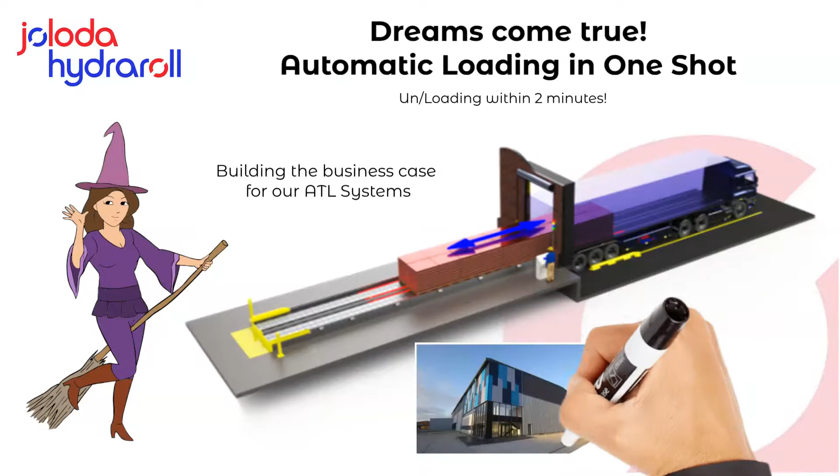But before I begin, allow me to briefly explain about Joloda Hydraroll. We are the world leaders in loading solutions, supplying efficient, effective loading and unloading systems for over 50 years. Thanks to our expert knowledge, we match the right solution with the right business every time. And with an experienced network of over 30 global distributors, we can help innovate, automate, and streamline your logistics wherever you are.

Building the business case for ATL system. Now you can see the main points of our methodology. In the next slides, we will examine each one in more depth.

Joloda Hydraroll's questionnaire. The first step in building the business case is for us to understand what your current situation is. The questionnaire helps us to do this.

Assessment of viability. When we have received the complete questionnaire, we study it to assess the viability of the project.

Current situation in a schematic drawing. If we consider the project is viable, we illustrate the current situation using a schematic drawing. At this point, we have all the information needed to develop the project.

Now, we will be focusing on the following aspects: quantitative and qualitative analysis. Here, the return on investment is one of our priorities.

Choosing the best solutions. After analyzing your requirements, we will choose the most efficient solution for your project.

Drawing of the future situation. We illustrate the proposed and current situation in a schematic drawing, where you will be able to compare both.

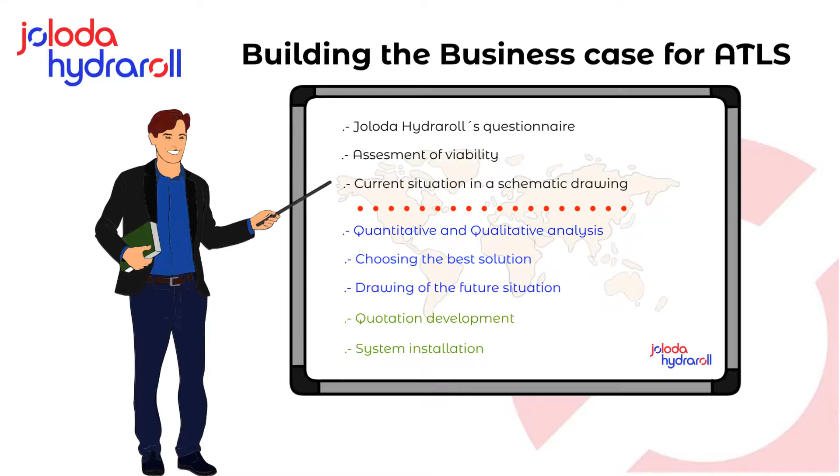Joloda Hydraroll's questionnaire. This questionnaire is the foundation of the project, and it's divided into a number of sections.

Contact information: we ask you about the people who will be involved in the project. Background information: how you work in the current situation. Loading types: type of products, pallets, how many pallets move per day, etc. Operational working day: how many hours, shifts, etc. are worked per day.

Current equipment and transport information: what type of equipment and trailers you use. Trailer trip information: what type of trips the trailers make. Duration of the current trip: how long the logistics process takes overall. Additional data: costs involved in the operation, photos of equipment, pallets, etc. In fact, all the information you will share with us.

Assessment of viability. When the questionnaire has been filled out, it's time to assess the viability of the project. The assessment involves our sales, technical, and projects departments, focusing on the link between the requirements of the project and our solutions. We can then decide if the project is viable.

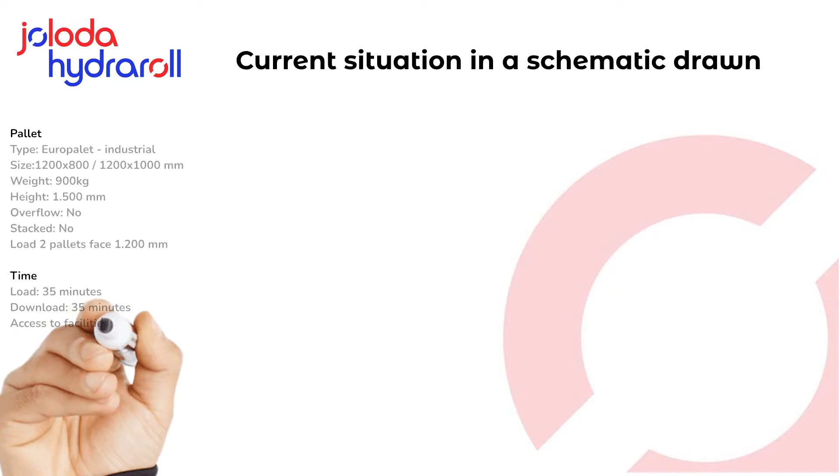Current situation in a schematic drawing. As the saying goes, a picture is worth a thousand words. We always make a schematic drawing of the current situation. In this example, we have drawn a standard situation.

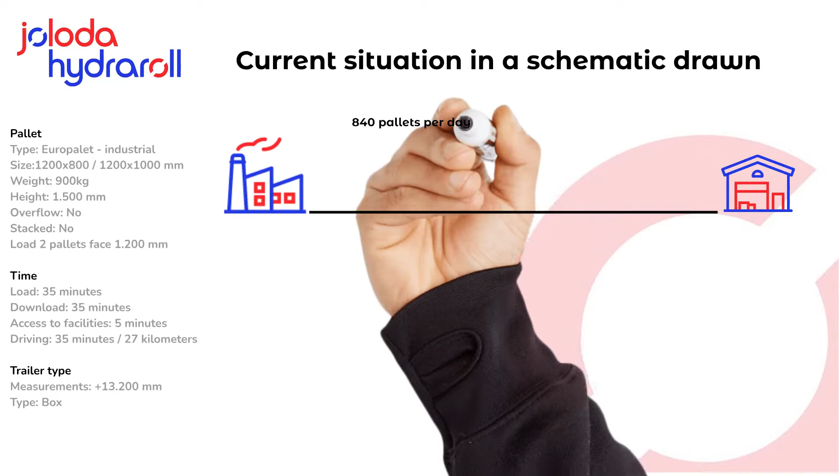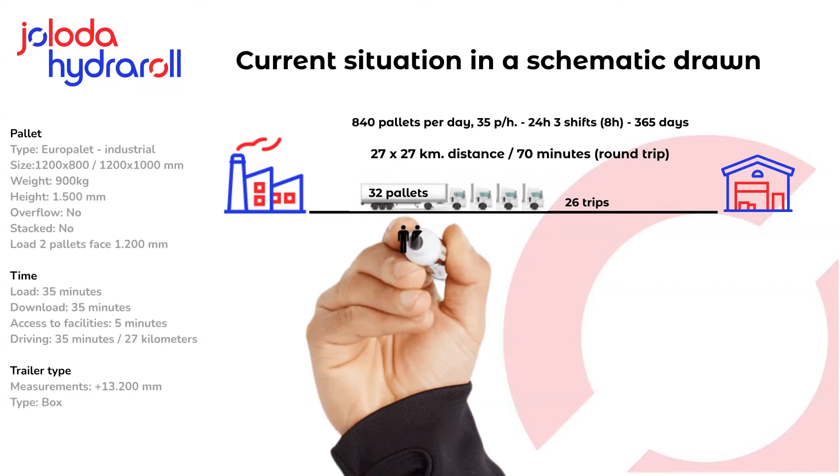One factory needing to move 840 pallets per day to a warehouse, working 24 hours per day, 365 days per year. Each truck can load 32 pallets and the distance between both sides is 27 kilometers. In this example, I needed 4 trucks, 12 drivers, 2 forklifts and 2 drivers for all the movement.

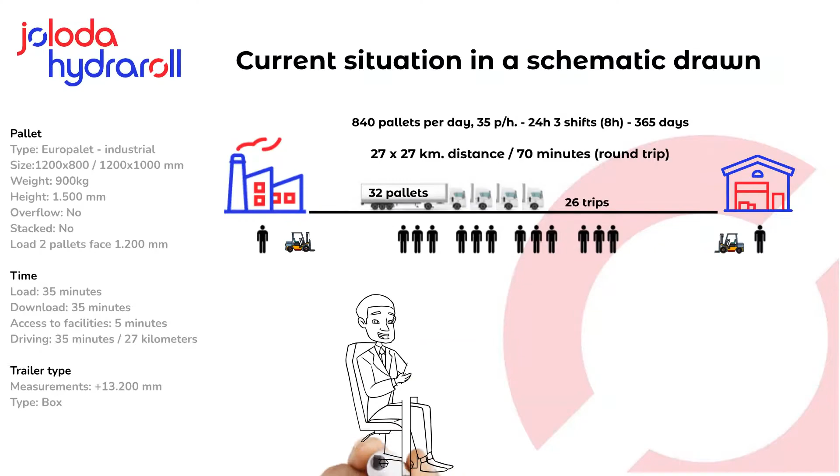When we have represented all the information on the drawing, we will organize a meeting with you where we can discuss the details. At the end of our meeting, we can make any adjustments necessary.

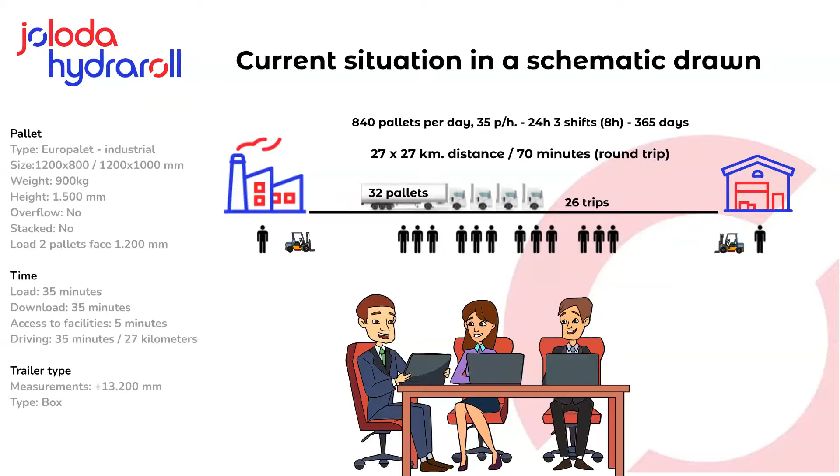Quantitative and qualitative analysis. The questionnaire gives us the information we need to develop the graphics that you will see in the next slides. In this slide, we have incorporated part of the information that you provided, such as number of pallets per day, minutes per operation, working hours, number of shifts, pallets per truck, etc.

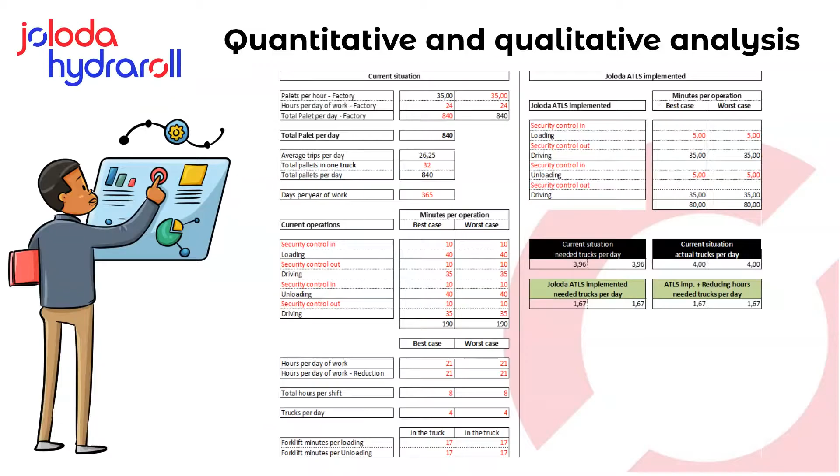Number of trailers. This graph shows us the number of trailers we need to perform the service after having installed our ATLS system, compared to the current situation. The result is we will go from needing 4 trailers to needing only 1.67 trailers. It also shows us the number of trailers needed to perform the service with the reduced hours.

It allows us, among other things, to adapt to possible traffic restrictions, avoid peak traffic hours, adapt the schedule of service to the most productive internal workflows, and obtain as result greater efficiency of logistics, reduce environmental impact, cost reduction, a greater well-being of the population, no occupation of public roads, etc.

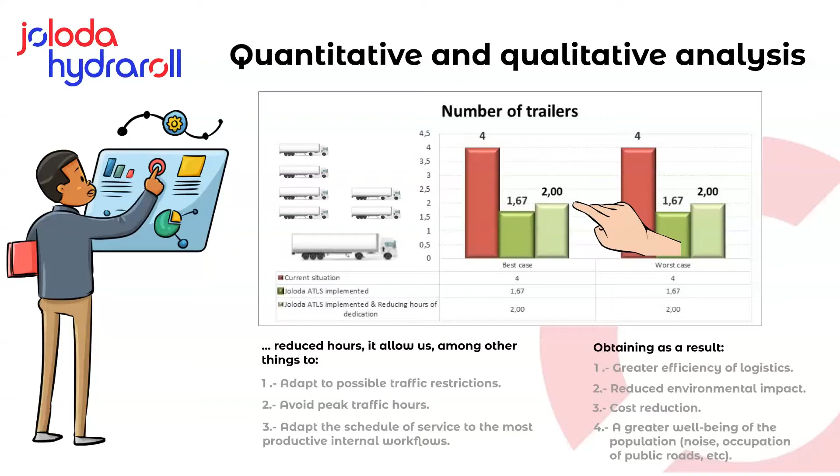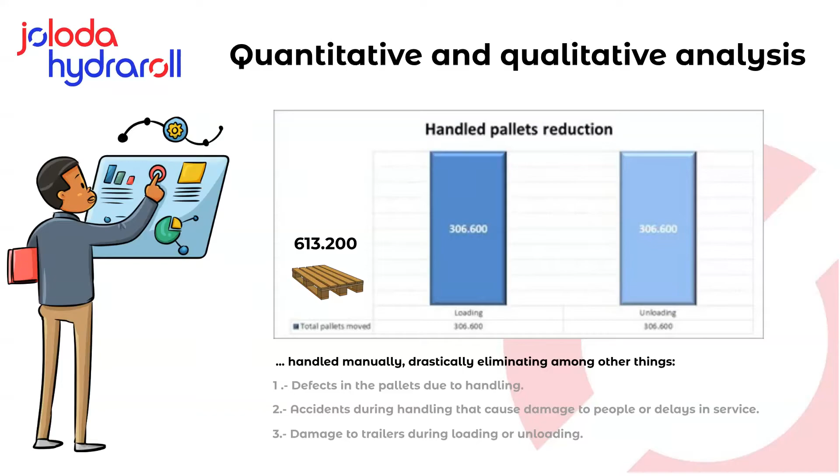Handled pallet reduction. Up to a total of 613,200 pallets per year will no longer be handled manually, drastically eliminating, among other things, defects in pallets due to handling, accidents during handling that cause damage to people or delays in service, damage to trailers during loading or unloading, and reduction in forklift operation hours.

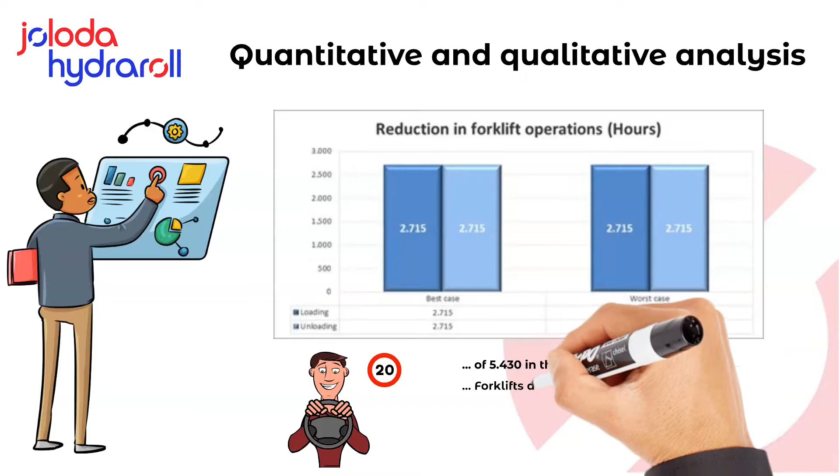After having installed our ATLS system, there will be a reduction of 5,430 in the number of hours worked, solely by the action of introducing the pallets from the dock to the trailer or vice versa. Forklift drivers will no longer be necessary for this task.

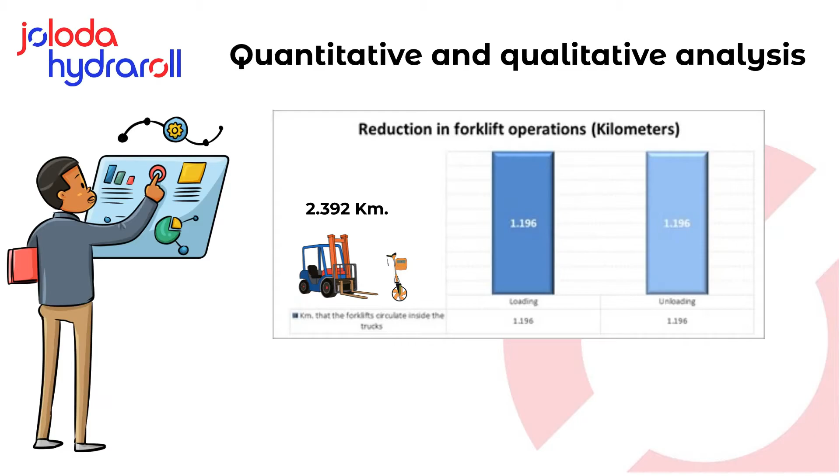Reduction in forklift operations, kilometers. After having installed our ATLS system, the direct cost of using forklifts will be reduced since they will circulate 2,392 kilometers per year less than previously. However, the reduction in indirect costs resulting from the total elimination of possible accidents that may occur, accidents related to people, the material handled, and the trailer, should also be valued.

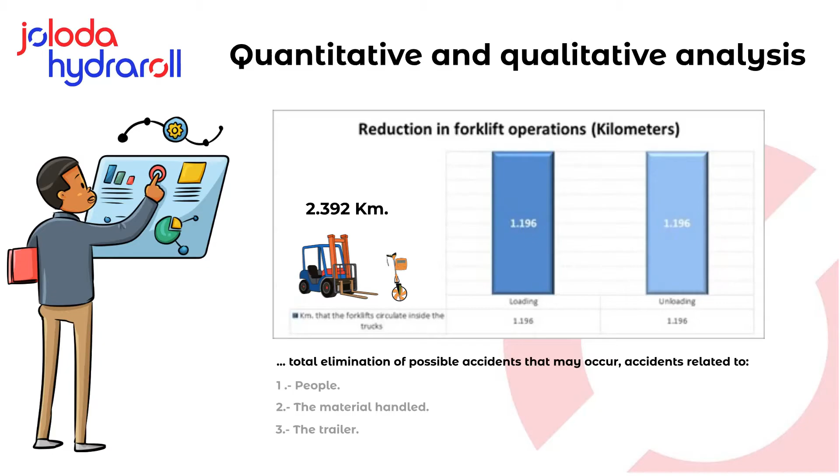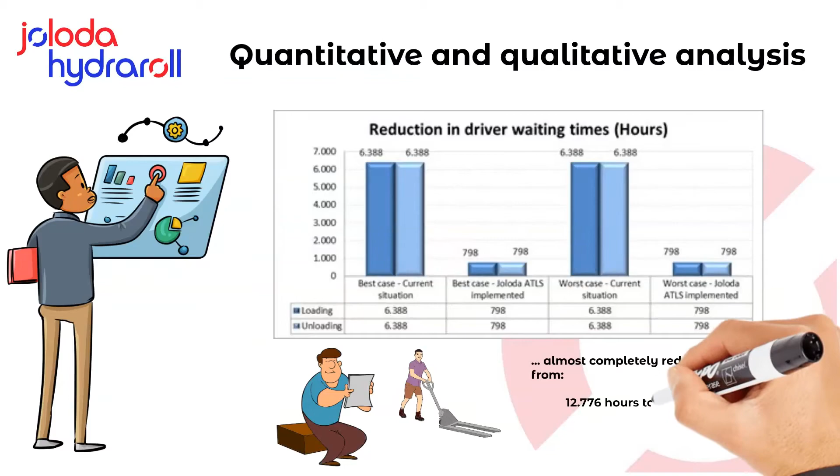Reduction in driver waiting times, hours. After having installed our ATLS system, there will be a reduction in waiting time for trailer drivers, who sometimes remain inactive and sometimes perform tasks that are not inherent in their functions. As can be seen, the total waiting hours per year is almost completely reduced, going from 12,776 hours to 1,596 hours.

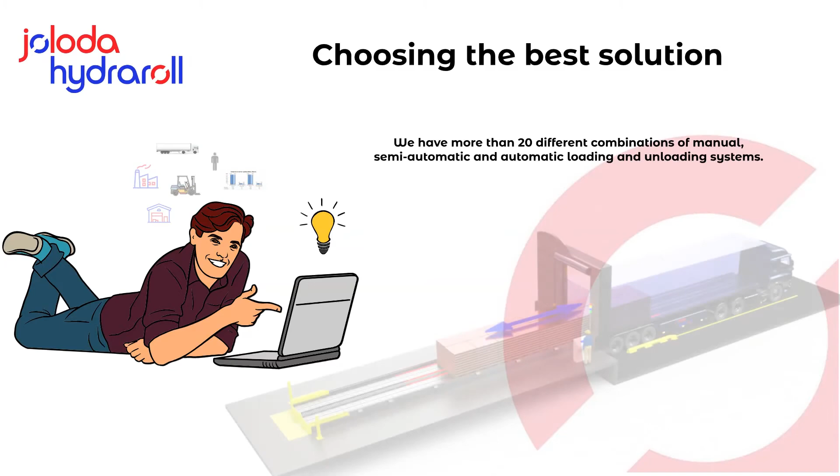Choosing the best solution. We have more than 20 different combinations of manual, semi-automatic, and automatic loading and unloading systems. With our knowledge, we can find the best solution for your project. Our solutions are constantly being improved in line with market requirements.

Drawing of the future situation. This slide illustrates the situation before and after ATL system implementation. Normally, we reduce, among other things, the number of trailers by half and eliminate the need for forklifts in the process of loading or unloading. Overall, we improve the efficiency of the supply chain. We will discuss these schematic drawings with you during the presentation of our proposal.

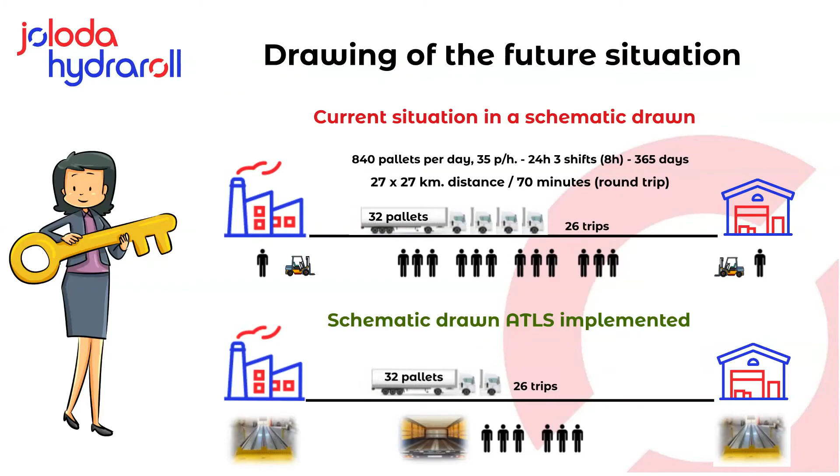Our quotation, first part. The first part of our quotation contains a lot of information that will help you understand what is involved in the project. Our quotation also includes links to videos showing the system that we propose to integrate into the project.

Our quotation, second part. The second part of our quotation provides detailed information that illustrates the viability of the project from quantitative and qualitative aspects, including the return on investment.

Installation. A Joloda team working with our partner in your area will carry out the installation and commissioning of the system, including training for your personnel.